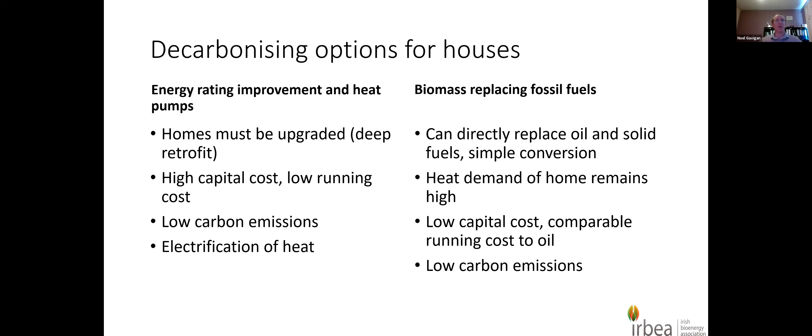The two options we're looking at here are: one, converting the oil boiler to a biomass boiler, or the other, a deep retrofit to the BER rating of B2 and installing a heat pump. With the biomass boiler, your heat demand remains the same at 24,000 kilowatt hours. Your annual CO2 emissions are reduced by 90%, from 9.58 down to 0.95 — a significant reduction. That can be reduced further as we refine the process for producing pellets and logs, and indeed for logs it would be lower than that, as this is based on pellets. The capital cost for simplified systems is running at around 6,000 — we've seen different figures, plus and minus 20 to 30% on that. That's just a figure we've pulled in there. And the annual cost of heat is reduced by about €600 per year, so there is a significant reduction in the cost of heat.

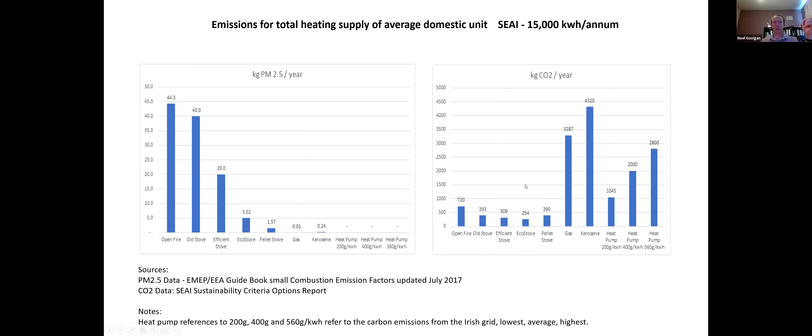But from that, I just want to pass you - the next person I'd like to bring in is Ger Crosse. Ger runs Woodco. He's the commercial director for Woodco, and they manufacture wood pellet boilers in Tipperary, and they're also involved in installation. They do both industrial and domestic systems, and Ger is just going to give a run through of what they offer and what is available out there in the domestic scene. So Ger, if I can pass over to you, if that's okay.

Yeah, thank you, Noel. Good morning, everyone, and yeah, I'm happy to be invited this morning. So it's - yeah, I've been working in the pellet industry in Ireland for over 10 years, and I've seen a lot of changes in it.

So one of the things I just wanted to do this morning was just share with you a bit of a journey of pellet heating in this country. So I'll just pull it up if you can see it and share the screen.

Just a second now. Okay, can you see that? Yeah, Ger, we can see that. That's okay, yeah, I'll just go up to the top now.

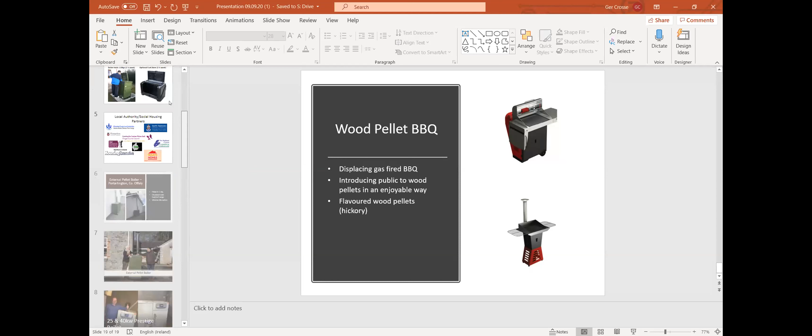Okay, so really what I've just set up, just 15 slides, it'll be probably 10 or so minutes, and it's wood pellet appliances and applications for them in Ireland, and how we're seeing things changing over the years and a greater adoption of them.

So I suppose our journey started out - and this isn't about Woodco in any means, it's just a little bit of the journey of wood pellets in Ireland - but our journey particularly started out with social housing. We got - which is something you wouldn't ordinarily consider wood pellet heating in - we were approached by the housing executive in Northern Ireland over 10 years ago to come up and design a wood pellet fired boiler that could be used in social housing properties.

And it was a bit of a challenge, but really their motivations for doing it, and this is the interesting part, one was fuel poverty. They had a huge issue with fuel poverty in some of the housing estates in Northern Ireland, where oil was the predominant fuel, oil or electric, very expensive forms of heating.

Secondly, allied to fuel poverty, their tenants were having to go down when oil hit 70 or 80 cents a litre to the local filling station and fill a 5-gallon drum of oil and bring it to their house. Invariably, oil got spilled in the back gardens wherever their boilers were, and that led to investigations into oil spillages and environmental impacts. One year alone, the housing executive in Northern Ireland spent £1 million investigating oil spillages in back gardens of properties. So that was another motivation to move to pellet.

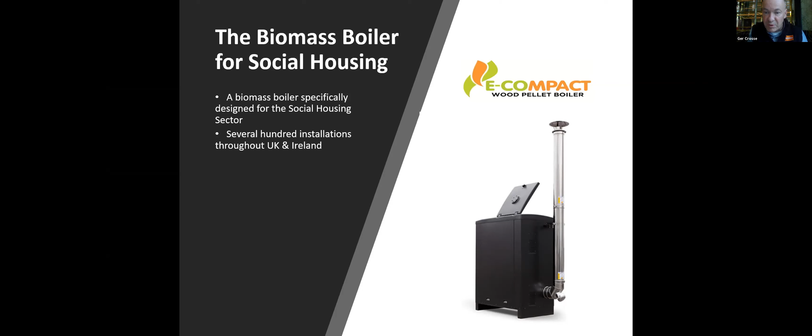Those are the types of properties they were typically sold into, again a property you probably wouldn't ordinarily consider putting a pellet boiler into. We had a good lot of success in Britain then; local housing authorities and social housing bodies embraced it. There's a picture going back to one of the first boilers about 10 years ago in County Armagh. The client is putting his bags of pellets in, it holds 110 kgs, lasted about a week and a half. Again, it was a solution to fuel poverty, and it proved very well.

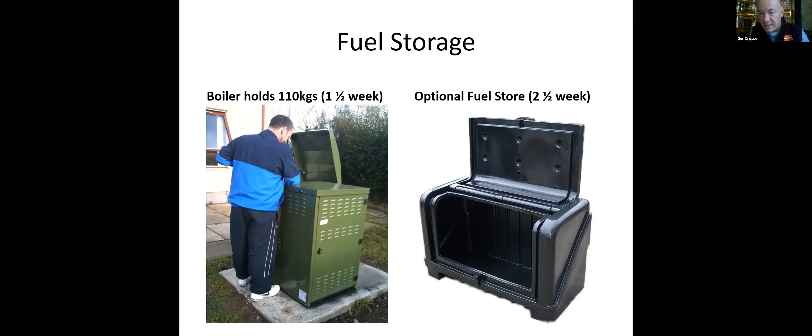There's a number of local authorities or councils we worked with throughout Britain and Ireland. I suppose it was an outdoor wood pellet boiler, which is a little bit unique to this part of the world, and we've all become accustomed to an outdoor oil-fired boiler. So we just designed an outdoor pellet boiler.

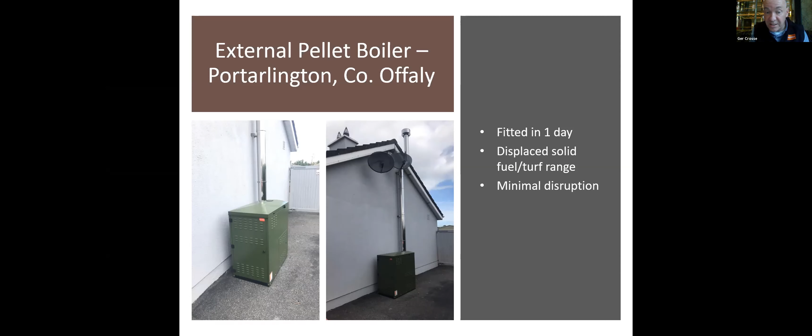Just in more recent times, that's one we did in Portarlington, County Offaly, this year. Again, if you didn't know, you'd probably think it's an outdoor oil boiler. That's an outdoor pellet boiler, holds 110 kgs of fuel, and the tenant or homeowner in this case fills it every week. In that case, they displaced a solid fuel turf burning range which was inside their dwelling. That boiler was fitted within 1 day, and it's fully weatherproofed and sits outside.

People are more familiar, I guess, in Europe with putting their boilers in basements or in garages, and we also have an internal range of boilers. That's quite typical - you see a happy customer there on the left from County Kilkenny. You can also see on the picture on the left...

...just the auger. He has an outside fuel bin, 3.5 tons, and it's automatically fed into the boiler. You have automated cleaning, automated deashing in many cases, PID control, fully modulating from 100% down to 30%, very efficient - over 90% efficient in all cases.

The boiler on the right is in Athlone in the middle of Ireland. The client in this case didn't want to purchase a 3-ton silo, so we have a separate bin beside it which holds 400 kgs of fuel, and it's all automatically fed. So at any one time, the client probably has half a ton of pellets in his fuel store. You can see there, he has a bag of pellets, he fills it manually.

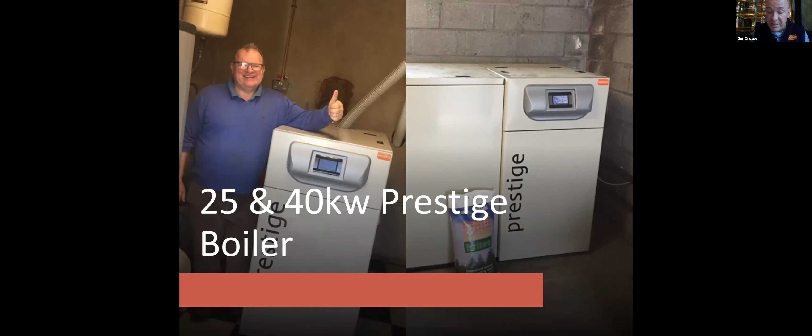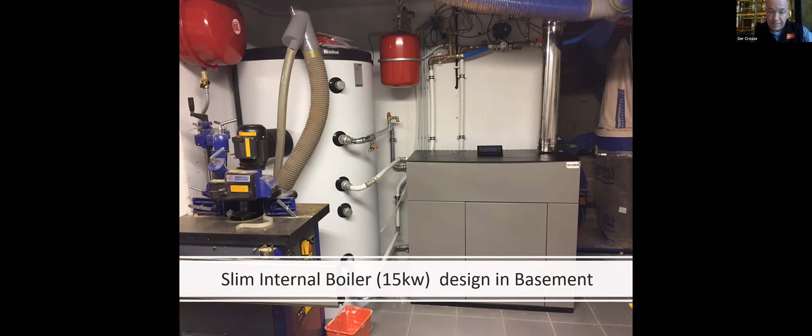Again, in Europe, where we've supplied boilers, you see them in basements, and this is a typical one of our slim boilers in a basement. In Ireland, most people don't have basements in their properties, so they either put them outdoors or in a garage away from the property. But that picture would be a typical installation in a basement - nice and tidy, of course. And as I said, most if not all of the boilers are now Wi-Fi enabled, so you can control them from your mobile phone and all of that.

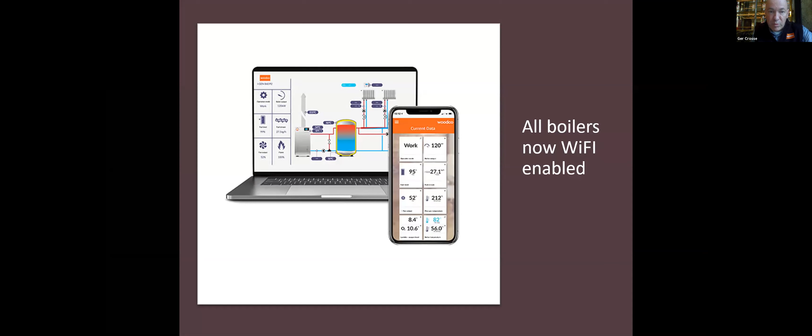Some of the criticism of biomass boilers and pellet boilers in general, even when the RHI, the Renewable Heat Incentive, was running in Britain, was that it was considered the preserve of rich people - that the people who benefited the most from it were people with large properties who could afford to spend 15, 20 or 30,000 euro on a heating system. Certainly, I suppose the slides I've shown you up to now have shown that you can do it at low cost, and pellets should be the preserve of many other people rather than rich people.

We've done some nice large properties throughout Ireland, and we do an eco cabin version, which is a plug and play solution where the boiler, fuel store, the entire plant room is in a containerized solution and dropped on site.

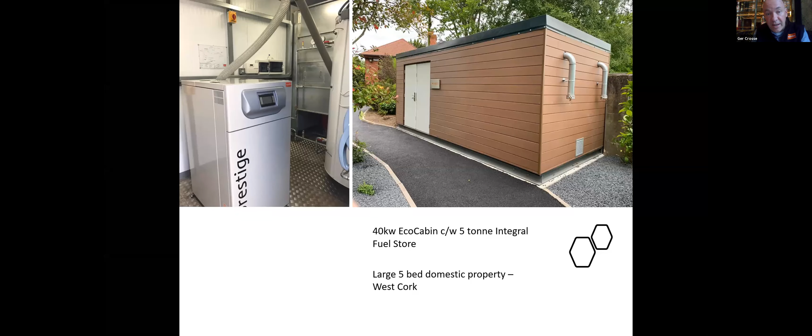Some other new appliances are coming to the market, we're trying to bring wood pellets mainstream, and boilers is one side of it. This is a nice product, a wood pellet cooker.

It's 14 kilowatt. There's a picture of one installed in a home in County Tipperary. You can see it's a nice natural flame, giving the effect of a stove in the living area. Also, it has a 14 kilowatt boiler.

So this particular cooker does the central heating as well, and also it's an oven. On the right, you can see the oven where they can cook, and it also gives nice ambient 4 kilowatt of heat out to the kitchen area itself. You can boil a kettle on the hot plate. We do have bolster covers as well, which you can pull down and put on top of the hot plates.

I see this as a very interesting product for the Irish market. In the Midlands in particular, lots of Waterford Super Stanley cookers would have been sold over the decades, where people bring in turf, fill their boiler, manually light it every day, manually take away the ash every day, and heat their homes relatively cheaply, but not very good for the environment, I'd have to say.

Now they can go to a wood pellet cooker, fill it with a bag of pellets, remove the ash pan once every 2 or 3 weeks. Very efficient, very clean, and it's an exciting product.

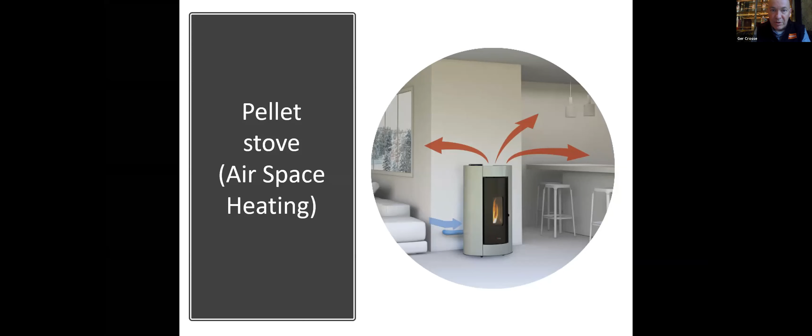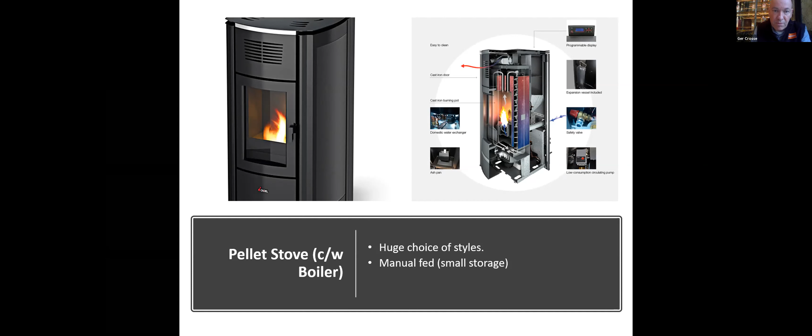This is another pellet stove from Cadel in Italy. We work with them, and again this is a boiler, so if somebody wants a nice natural flame in their living area, and they can also centrally heat their home, it's manually fed and fully automated, all the usual stuff, automatic cleaning, Wi-Fi enabled, and very stylish and a nice feature in the home, so they're becoming more popular in Ireland.

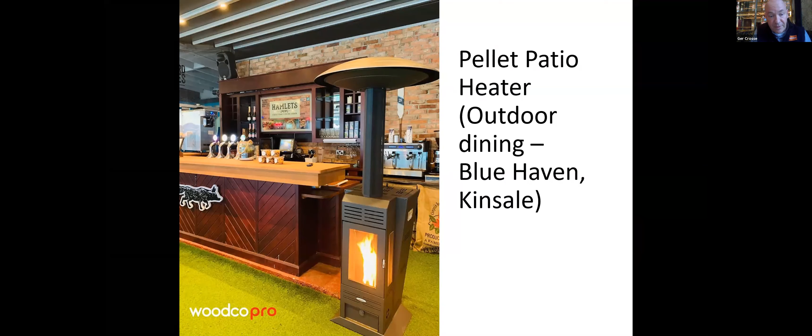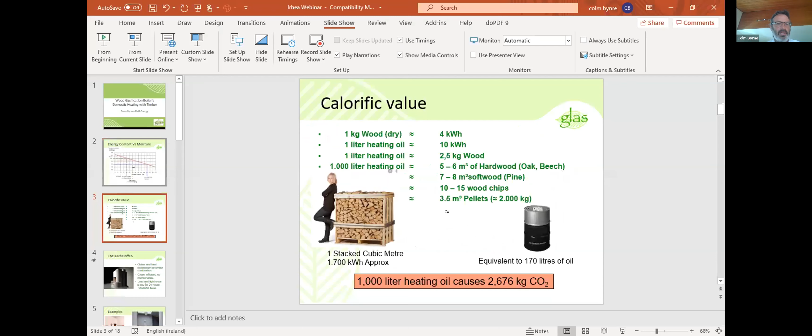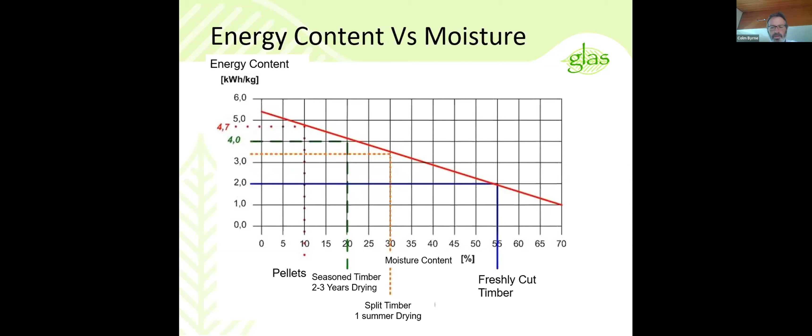So again, it's just reiterating the importance of seasoning the timber prior to combustion. A kilogram of good dry timber gives us about 4 units of energy.

To put that into context, if we look at a litre of oil, it provides us with roughly about 10 kilowatt hours of heat, which is equivalent to about 2.5 kilos of timber. So often when people are trying to quantify how much timber they'll need to heat their home, we compare it to 1,000 litres of oil. 1,000 litres of oil will require 5 to 6 cubic meters of hardwood, like oak or beech, which has a higher energy density, whereas with softwood we need about 7 to 8 cubic meters.

You'll see a photograph there on the left of what a cubic meter looks like. So just to put it into context, if you're burning 1,000 litres of oil, you need somewhere in the region of 6 to 7 of those palletfuls of timber per annum to displace that oil.

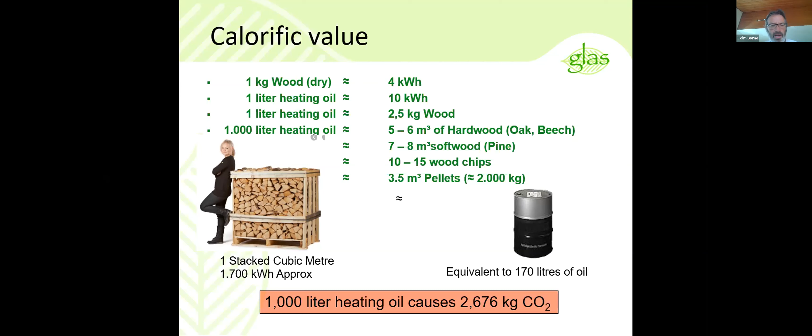I suppose based on that, we can calculate what an annual timber consumption requirement is for a home once we have a historical reference on it.

Very briefly, I'm going to talk about probably the oldest method of gasification that is still in action today. It's a system called a Kacheloffen. When you gasify timber, when you get it up to a proper temperature above 150 or 170 degrees, it starts to release the gas in the timber, and it's that gas that you want to capture the energy from.

Capturing that gas in a controlled environment and then storing that heat is something that's been done for hundreds of years. Actually, the oldest Kacheloffen system is about 500 years old in a large cathedral in Salisbury, and it's still used today.

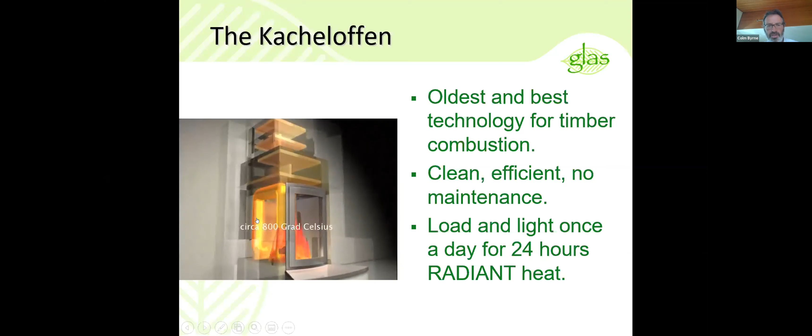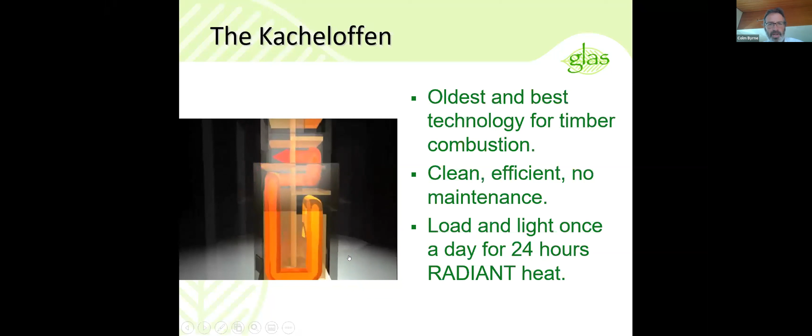The concept is in a controlled environment you light a fire, give it full oxygen at the early stages of combustion to get the temperature up within the fire to about 800 degrees, but within the core of the fireplace. These are specifically designed ceramic core fireplaces built for this purpose. The core itself starts to increase in temperature and rises to about 600 or 700 degrees and basically radiates that heat for 24 hours. So you light a fire once a day, and then you've got 24-hour radiant heat from this system.

They're obviously not for everybody, it's just a technology I want to flag. There's a couple of companies doing them in Ireland. It's not something I do myself, but we put one into our office back in 2003 in an old mill, and it's actually a pleasure to be around.

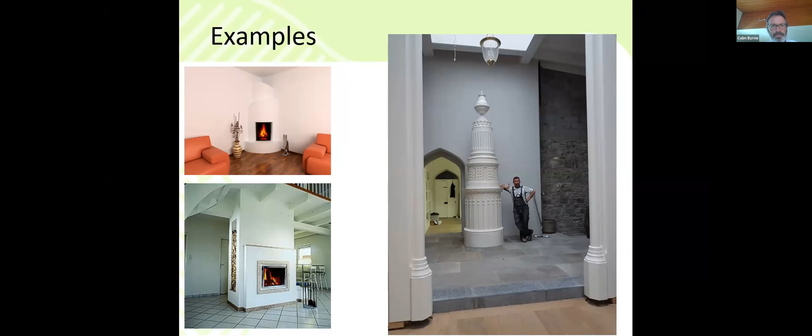When it comes to gasification boilers, this is where we're trying to as efficiently and conveniently as possible use timber to meet a daily demand. The boilers I started to work with back in 2005 are designed by a Bavarian company that have a tradition in log heating. The company started off building these boilers, but the idea here is to have a fueling chamber that has the heat capacity to meet the daily demand of the house.

In other words, to minimize the labor interaction, you fill the boiler once a day with enough timber to meet the daily demand where possible. That varies dramatically based on the weather, usage in the house, etc. But the general principle is that we try to size the system so the fill of timber in the fueling chamber meets the daily demand. This is a typical boiler we install, about 15 to 30 kilowatts, holding about 150 liters of timber.

The gasification process requires control of both primary and secondary air. You're feeding air into the first combustion chamber to get the temperatures up, and then as it releases gases, you're feeding air into a secondary chamber. The function is to extract the maximum energy from the timber, and these typically run at between 90 and 93% efficiency. Very clean burning.

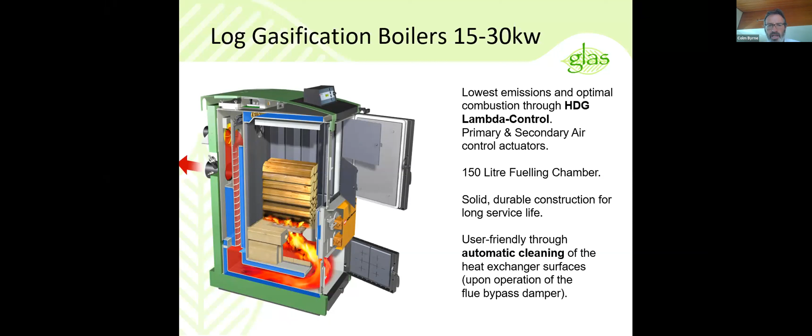There's various different shapes and sizes. This is a different type of model, which is top loading, has a higher output, and also has an optional liner inside the chamber that allows you to put sawdust or shavings in, particularly if you have access to fuel in a timber workshop, for example.

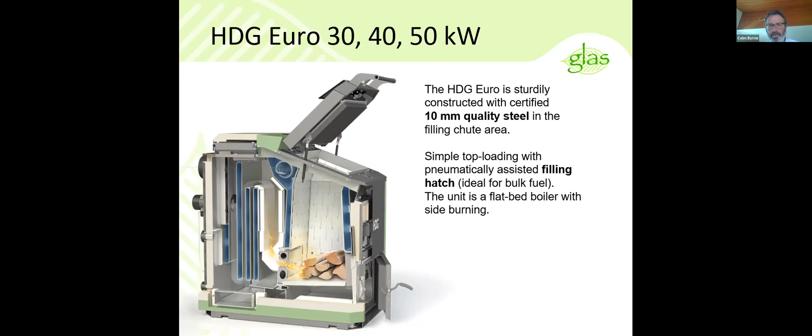It's essential that you have your timber dry down to a low moisture content in order to get that gasification process working smoothly. It also ensures a very clean burn. You shouldn't really see any smoke after the first minute or two when it lights up. It should be just like hot air coming from the chimney, and proper combustion means no tar and very little ash.

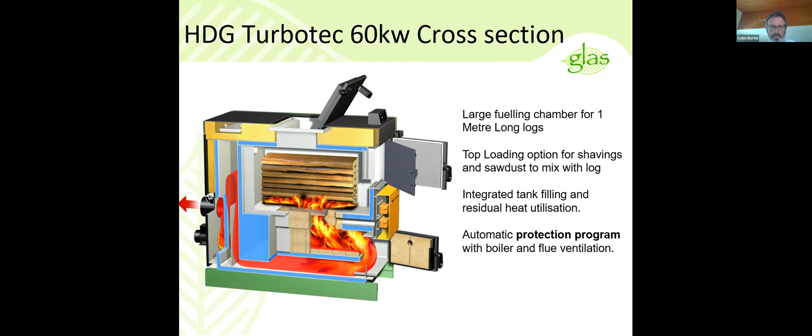That is driven primarily by having properly seasoned timber and good control systems on the boiler. In terms of what you typically need in the house, we always install a buffer tank system with our log boilers.

The buffer serves as the means to store the energy the boiler is producing. So you fill your boiler once a day, first thing in the morning. Your heat demand is spread out over 12 to 18 hours, but your boiler combusts at full efficiency for 5 or 6 hours, and all of the heat contained within that timber, or 90% of it, is stored in the buffer tank to be available on demand in the house.

The size of this buffer is directly proportional to the energy content that the boiler can produce from one burn. So the fueling chamber size determines the size of the buffer tank, and it's an essential component for providing that cushion and ensuring the boiler runs at its optimal efficiency.

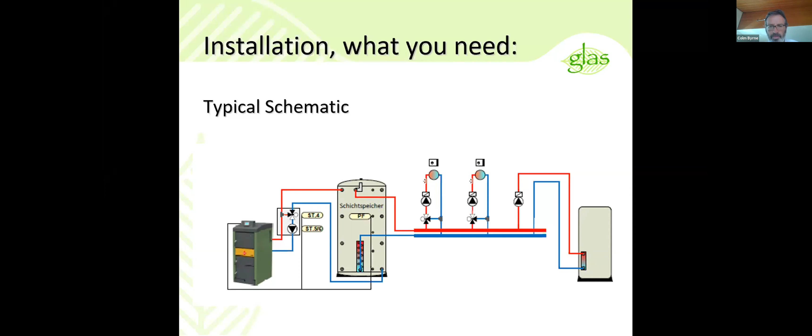Without the buffer, once the radiators heat up on the system and the water starts coming back warm to the boiler, it will automatically have to start shutting back its combustion, which means it's smoldering and not combusting properly. So the buffer is essential for clean burning.

More often than not, we find that when we integrate it, we go back in a year or two and the customer hasn't used the oil boiler at all, and they're in the process of taking it out or have taken it out. But it's there as a backup cushion, I suppose, for those concerned about the transition.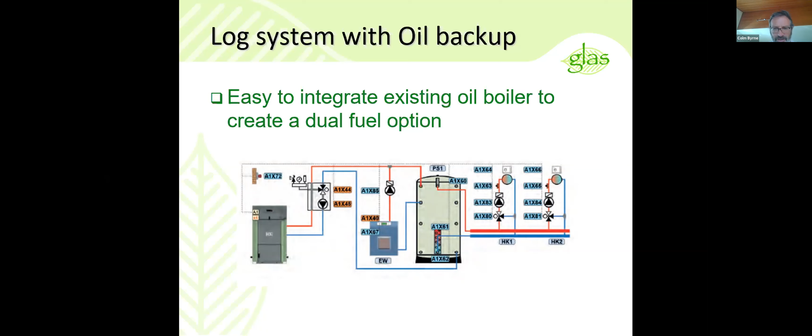Like Gerard's technology there, the control systems on biomass systems now are quite advanced, touchscreen, remote access. You can control all the heating circuits in your house. There is even an automatic ignition version of one of the boilers, which allows you to fill the boiler in advance and then control it remotely to light it from a remote location.

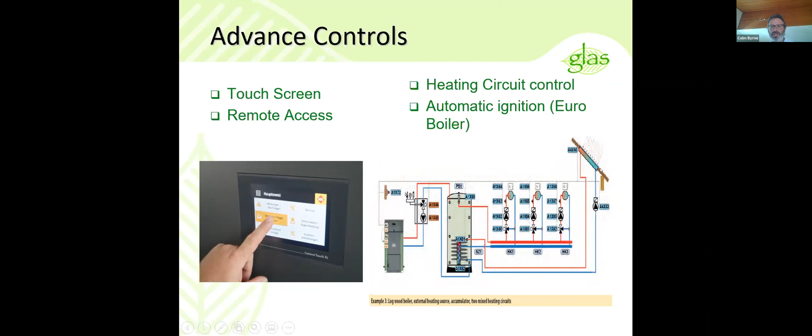You can obviously integrate other heat sources like solar into the mix as well, and it can be controlled from a central smart control. These are just a few examples.

They've done the windows, insulated the attic, but yet it is still a D rating, and this person has access to timber. He's one of many customers extremely frustrated about switching to biomass and not being eligible for a grant to reduce his carbon emissions and switch to renewables. It's definitely something I want to flag here, that it needs to be considered to be brought back into the SEAI Domestic Energy Upgrade Grant System, because I sense huge frustration from potential customers that it's not being supported.

This man has all his own timber. He's actually been collecting timber for 2 or 3 years, waiting for his time to install his log boiler, and frustrated at the fact that there's no grant available. So he went ahead and did it anyway this Christmas.

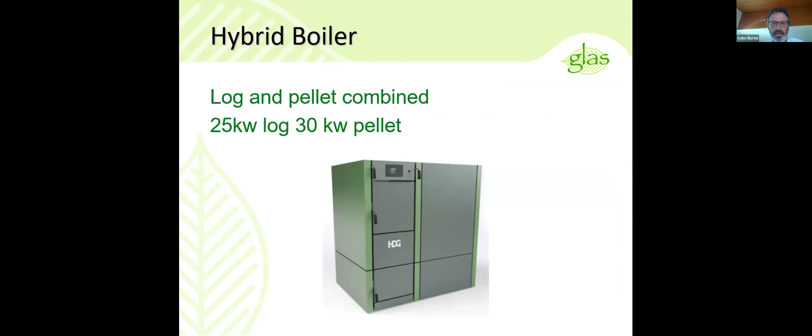So very briefly, why I would see wood as an essential part of the energy mix. Obviously, we know from your slides, Noel, that it's a carbon neutral resource. This obviously is a big benefit with the talks of carbon taxes from a homeowner's perspective. You're secured from that, so it gives this long-term price stability, especially if you have the location to grow your own timber. It's now very proven technology, it's very convenient to use and it's very clean.

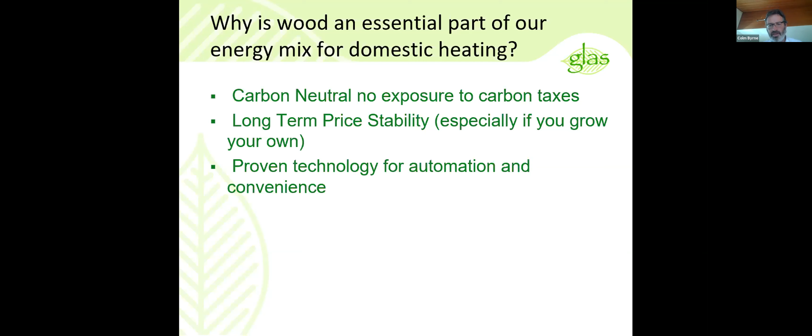I suppose it's a sustainable indigenous resource and it has huge benefits for not just the user but also the local economy. And I see huge potential. I'm doing work with some rural communities, and we're looking at energy plans for the 5 to 10 years ahead. We see biomass as an essential component for benefiting the farming community. Like one town in particular in Kilkenny, 2,500 people, there's over 2 million spent on heating that leaves that town every year. At least half of that could go to the local farmers or to a wood fuel resource in the town. So it has a massive impact, not just on carbon and on the homeowner, but also on the rural economy. So it's essential that this gets the attention that it deserves.

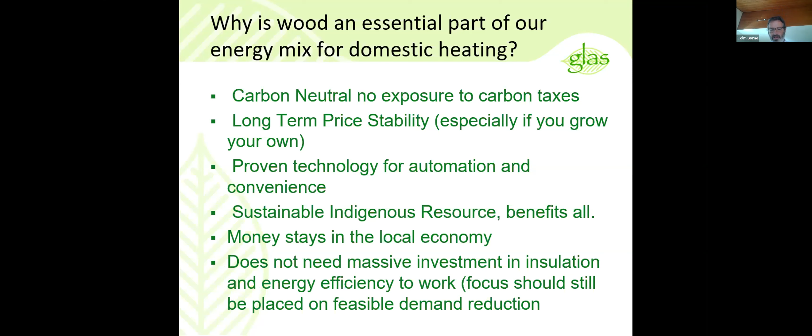Again, you've hit that one, Noel. It doesn't need massive investment in insulation and energy efficiency to work. I would still emphasize that you should, where feasible, reduce your demand, because the unit of energy saved is the most valuable one. It means you're not burning unnecessary timber going forward. That's a little bit about ourselves. If anybody wants to know more, I'm sure Noel's going to share the slides. So that's my lot, thank you very much.